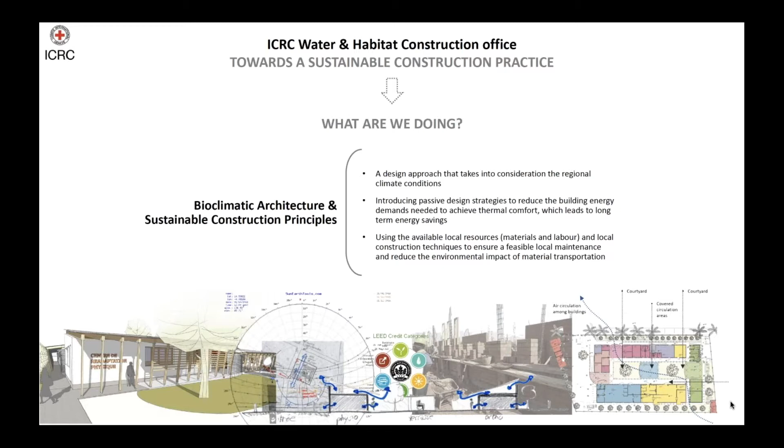Next one, please, Vanessa. I would quickly move to the presentation of three ongoing projects. The first two are physical rehabilitation centers in Mopti and in Bangui, and the third one is the new ICRC regional delegation in Nairobi. I appreciate that three presentations of three projects in a short time is rather challenging if you want to go to details.

Although, frankly, my intention is to provide you with a glimpse of our current activities towards energy efficiency and sustainability and designing for sustainability. And I will start with the project in Mopti. ICRC's physical rehabilitation program can be traced back to 1979.

Physical rehabilitation, for those who are not aware, includes the provision of mobility devices such as prostheses, orthoses, walking aids, and wheelchairs, together with the therapy that enables people with disabilities to make the fullest use of their devices. This project is a partnership between the ICRC and the state of Mali.

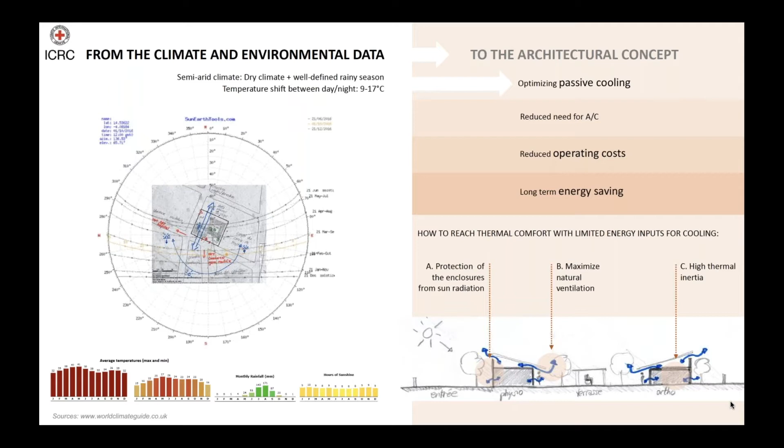The difference in temperature between day and night in Mopti is significant. So the use of materials with a high thermal inertia was imperative. Please, next slide.

In terms of architectural design, while certain factors are independent of construction, thermal comfort in a building can be largely influenced by constructive choices. Building shape, orientation, construction details, choice of building materials, coating, protection, name it. Optimization of different mechanisms for solar gains, natural and controlled ventilation systems as well.

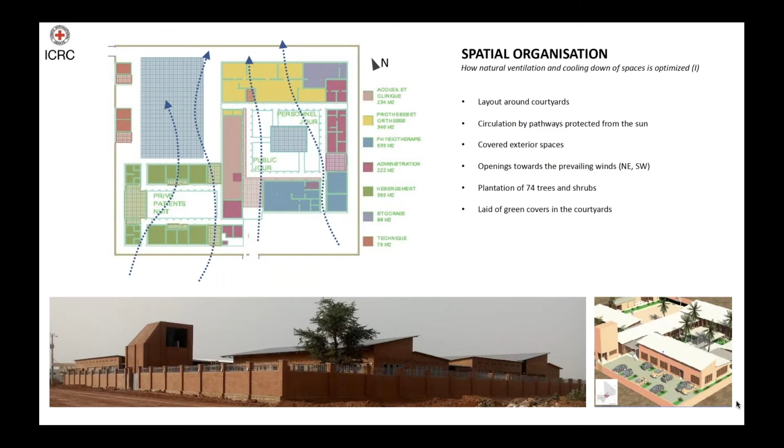The criteria for the selection of materials are a very, very important component of every single project. They were based on the local availability of materials, of course, the physical characteristics, structural and thermal properties, the availability of the skilled labor, the speed of implementation, the cost to build, and the maintenance necessity and cost.

Some examples of main materials used include the stabilized soil bricks for walls and ceilings, bamboo for external roofs covered in translucent roofing sheet to protect the bamboo from exposure to weather effects, while allowing at the same time natural light to pass through. Galvanized steel sheet for roofing with a false ceiling of timber and covered with reed mats. Natural stones for pavements and for parking. There were also other materials selected.

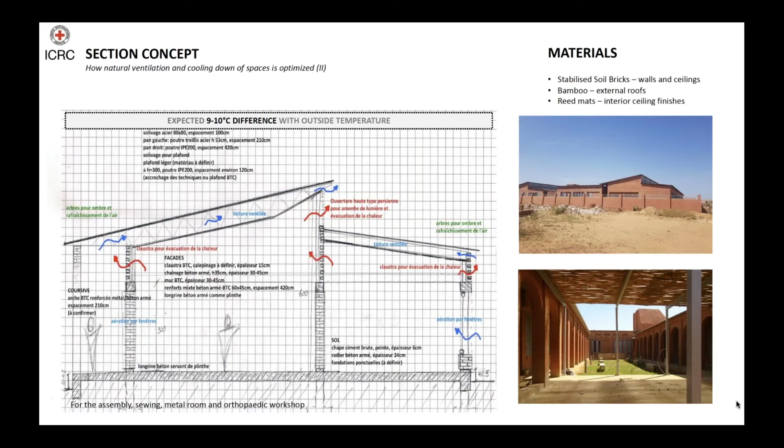Why stabilized soil bricks? The project adopted the use of the SSB bricks on its walls and ceiling vaults for various reasons. One of them is the brick measure, the size of the brick. Of course, it uses minimal cement content, from 5 to 10%, and requires no plaster for future maintenance. The bricks are easy to work with and have unique properties, allowing a natural regulation of the atmosphere in the dwellings. In addition, the stabilized soil brick can store heat and solar energy and release it in the form of radiated heat when temperatures drop, especially overnight.

The SSB offers great resistance. The compressive strength tested was approximately 60 bars, 60 kilograms per square centimeter. The production of the stabilized soil bricks uses 1% of the energy compared to fired bricks. Hence, we have less CO2 emissions. And of course, just-in-time procurement. The production was done on site, ensuring no need for transportation of the bricks, and they were used as soon as they were cured, approximately 21 days. The materials were all sourced nearby in the area, and the debris of cut brick, being predominantly made of natural material, is not harmful when disposed of to the natural environment.

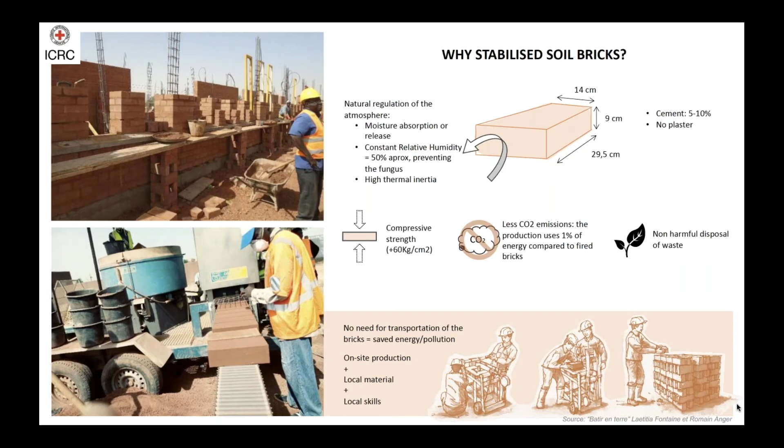This is another project. This is another physical rehabilitation center, in Bangui this time. The project currently is in the procurement phase, and we expect in a couple of months the construction phase to commence. The center would be connected to the electrical grid and also to the public water network, although the latter is not that reliable. In terms of a public wastewater system, there is nothing available in the area. As such, the use of septic tanks has been considered.

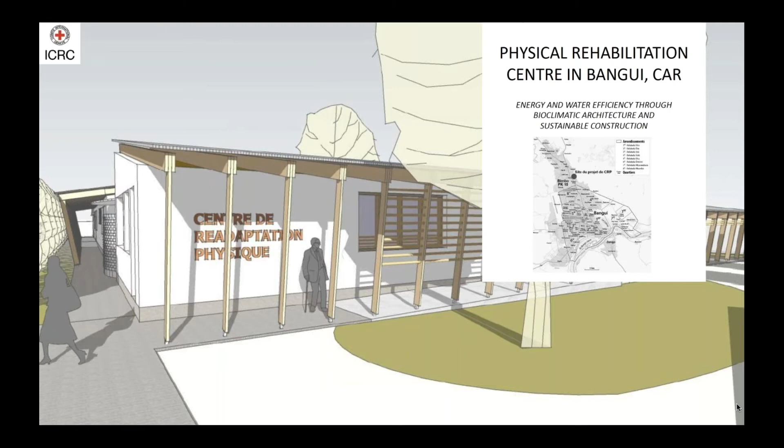Next slide, please. Once again, our design approach took into consideration Bangui's climate and environmental data. In this project, the principles of bioclimatic architecture have also been applied, aiming to adopt low-tech passive cooling solutions to avoid air conditioning and consequently to reduce the electricity demand.

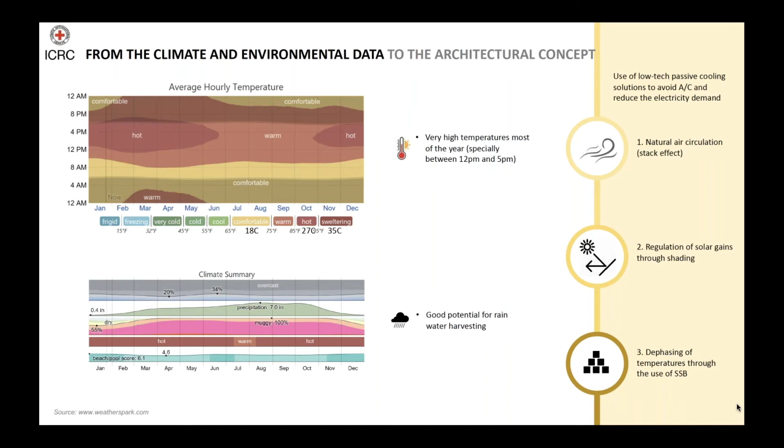The layout of the building forms an island articulated on an inner courtyard, as per the example of the similar project in Mopti. In this particular project, though, we were not able to find adequate or reliable data about wind. Hence, a design decision was taken to create gaps between the building blocks, aiming to facilitate the air circulation among the buildings.

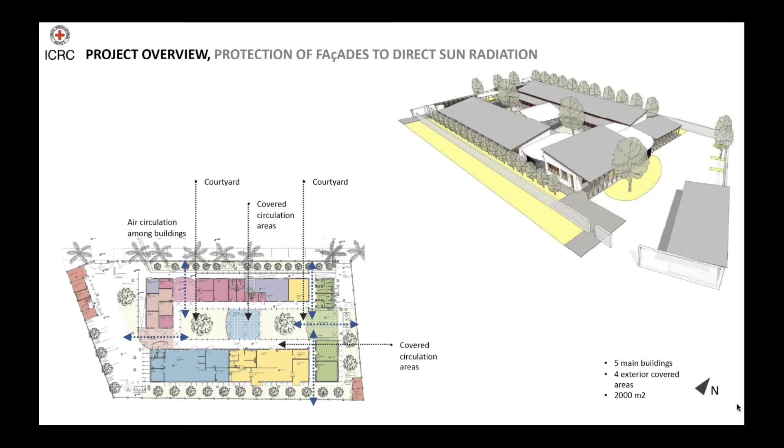As per the example of the Mali project, the use of the stabilized soil bricks has also been adopted in this project. Once again, the criteria for the selection of materials were based on the same principles as previously: availability, physical characteristics, availability of skilled labor, speed, cost, maintenance.

You will see on the table on the upper right side, the design decision was to use the double stabilized soil bricks, as in Mopti. And what is quite impressive is the U value, as well as the time lag and the temperature damping. So basically, the stabilized soil bricks are super energy efficient and sustainable at the same time, and provide better characteristics than other materials.

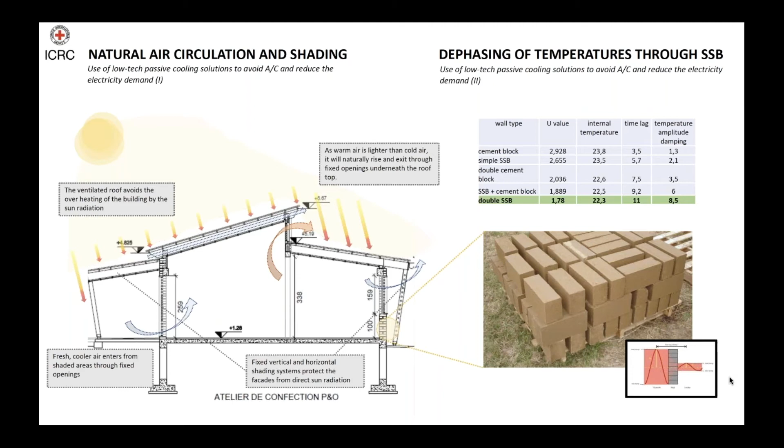I would like to emphasize the rainwater collection and use in this particular project. You could appreciate that each project is different. Even if we apply similar principles, every single time we try to also contextualize our design decisions and solutions. In this case, there are two rainy seasons: the small rainy season, the so-called mango rain, which is between February and March, and the main rainy season from August to December.

All year round, there can be shortages of water in the network. It's not reliable, with shortages lasting from a day to several weeks. So collecting rainwater and storing it is a sustainable way to have water available during water shortages and reduce the need for water trucking. The project also aims to limit water consumption by using rainwater collection. Again, the solutions chosen use simple techniques with low maintenance to ensure the sustainability of the proposals: a main rainwater collecting tank and small autonomous tanks with direct use for toilet flushing.

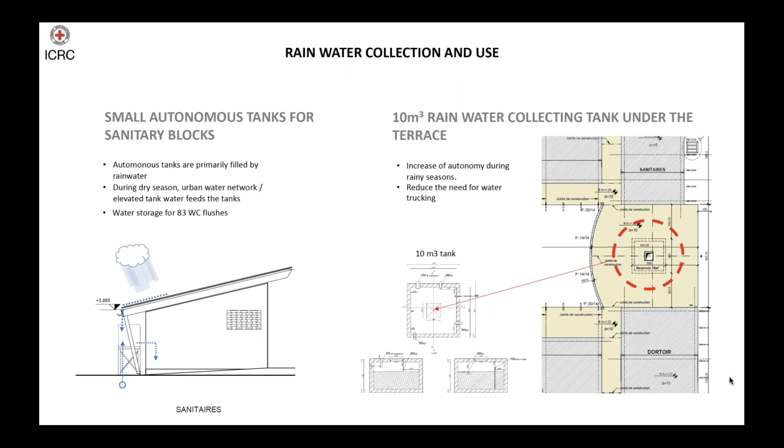The last project that I would like to bring to your attention is the new ICRC regional delegation in Nairobi. In this project, it's really a holistic approach to sustainable design. The aim since the very beginning was to reduce the operational and maintenance cost, and also to reduce the delegation's carbon footprint. Next slide, please.

In order to achieve our sustainability goals, the new regional delegation will be targeting a LEED certification. LEED certification, for those who might not be aware, is a world-renowned benchmark for sustainable green buildings. It is accepted worldwide as the highest standard for sustainable buildings because of its stringent criteria for certification.

As such, a LEED specialist has been appointed to assist us through the design and construction phase. This project is also currently at the procurement phase, and we expect the construction phase to commence in the next 3 months.

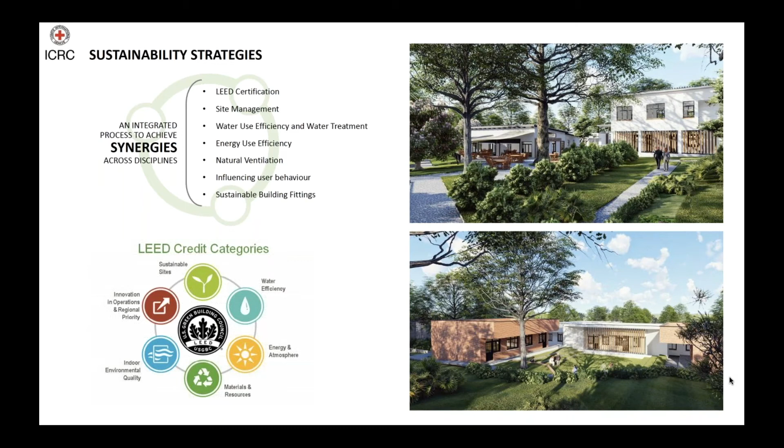As you will see, it's an integrated process to achieve synergies across many disciplines. This is why we have the LEED certification, the site management, the water use efficiency and water treatment, the energy use efficiency, the natural ventilation, very importantly, influencing user behavior, and the sustainable building fittings. The next slide, please.

Our design approach considered not only the bioclimatic architecture and sustainable construction principles, but also this time the requirements and preconditions arising from LEED. The plot area is approximately 36,000 square meters, and the total floor area to be built is approximately 7,800 square meters. Special consideration has been given to groundwater recharge, the preservation of the site, and storage and recycling during construction.

For example, in terms of tree management, an initial study was carried out to preserve as many trees as possible by identifying which of them were old, dead, posing a risk of falling, or were important species. Accordingly, considering all those trees and their positions, the design was aligned on those principles. The next slide, please.

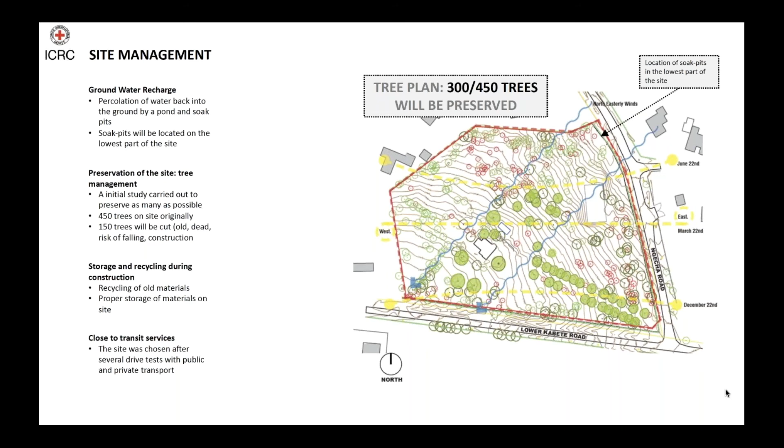In terms of water use efficiency and water treatment, the target is 95% of rainfall to be harvested. Rainwater surface runoff flows directly to the pond, which is in the middle of the site. It will be an artificial pond. For areas lower than the pond, the surface runoff goes into a holding tank and then it will be pumped back into the pond. From the pond, the water will be pumped into an overhead tank, where it will be distributed for flushing and irrigation.

In terms of wastewater treatment, the dirty water from the toilets and the sinks will flow into the wastewater treatment plant, which is in the upper right corner. The treated water will be stored in a holding tank, which then will be pumped to the pond. From the pond, the water will be pumped into an overhead tank, and then, as we said, it will be distributed for flushing and irrigation.

So the pond, apart from the aesthetics, will be used to help circulate the water around the site, and of course as a temporary storage for rainwater as well as treated water. In addition, water efficient fittings have also been considered for this project. Next slide, please.

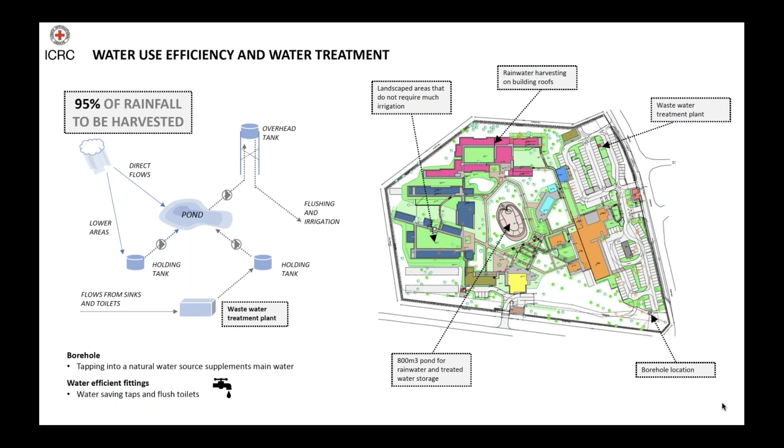Pavlos, could you wrap up in the next 2-3 minutes? I'm about to finish, yeah.

Yes, super, thank you. In terms of energy use efficiency, solar panels will be installed. The target is to have 120 kilowatts, which represents 20 to 24% energy savings. We'll have energy efficient fittings, as I previously said, using LED lamps, daylight sensors for all lighting, and also occupancy sensors. In addition, we will have a whole building energy simulation, which is also a prerequisite from LEED. Next slide, please.

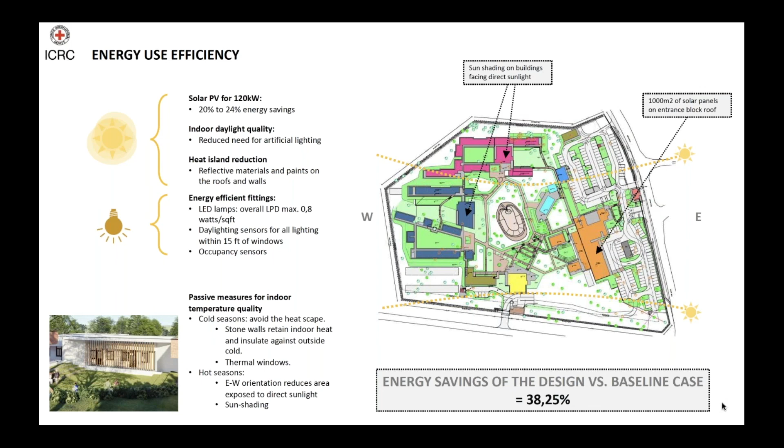I will go quickly on this one because it's the same principle as has been shown in the previous two examples about natural ventilation and about the stack effect that we should create in order to embrace natural ventilation. So I will move to the next one quickly.